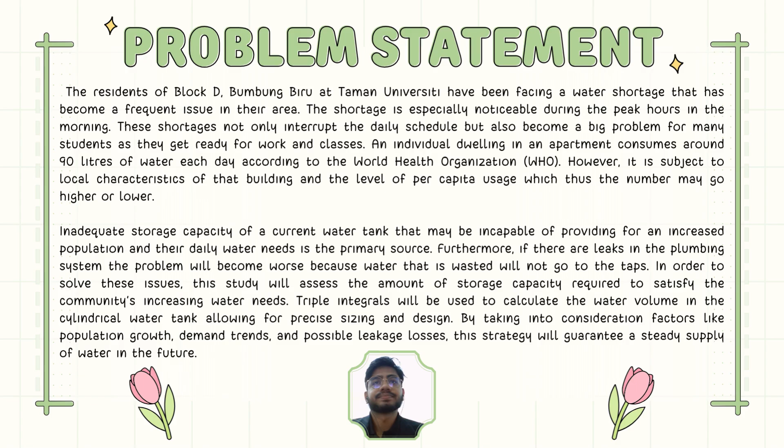Assalamualaikum. My name is Muhammad Amiruddin and I will continue with the objectives. For this project, our group has determined three objectives. The first one is to understand and apply the concept of triple integrals in the cylindrical coordinate system to calculate the volume of water. The second one is to evaluate water usage requirements for residents based on WHO recommended daily consumption. And the last one is to calculate and compare the volume of water storage in the tank with the daily water requirement of residents using the triple integral method.

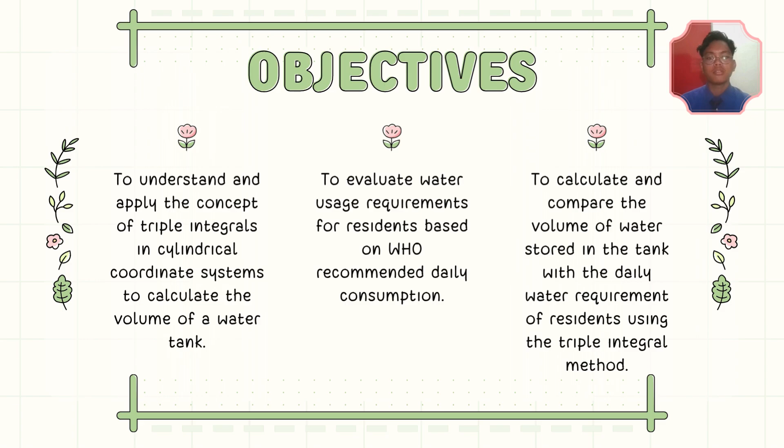Okay, now let's move on to the literature review. Let me brief you about the background of the project. Water tanks are essential components of water supply systems, storing water for domestic, industrial, and commercial use. Water tanks are very important to regulate pressure and ensure reliability during peak times or emergencies. Tanks have multiple uses. Based on their uses, the materials will be steel, concrete, or polyethylene, and they may be cylindrical, rectangular, or spherical in shape.

This study focuses on a cylindrical tank, with its volume calculated using the triple integral method in cylindrical coordinates for accurate results. WHO, the World Health Organization, recommends about 90 liters of water per person per day for basic needs, including drinking, cooking, and sanitation. This requirement may increase in urban areas due to lifestyle differences; factors such as climate, household size, and infrastructure can also affect daily water demand. And the lack of sufficient water can impact health and hygiene.

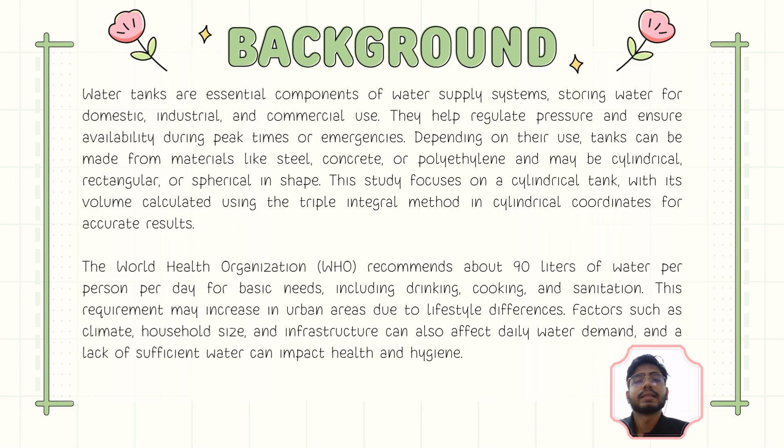Let's continue. Residential water use depends on household size, plumbing system, and user habits. Peak demand typically occurs in the morning and evening, putting pressure on the system. In high-rise buildings, water tanks are critical to meet this demand, but poor maintenance or leaks can result in up to 10% water loss, reducing usable supply. So, to ensure an adequate supply, the tank's storage capacity must match daily demand in the residential area.

So, this study calculates the tank volume using triple integrals and converts the results to liters for comparison with daily needs. Peak demand and future population growth are also considered in this design. For this case, Block D of Bumbung Biru has 20 units with 5 people each, totaling 100 residents. This estimate helps to determine total daily demand, with a safety margin added to account for changes in occupancy.

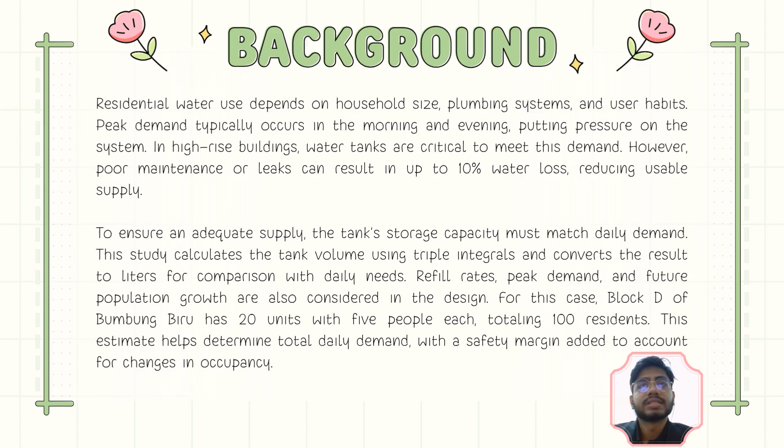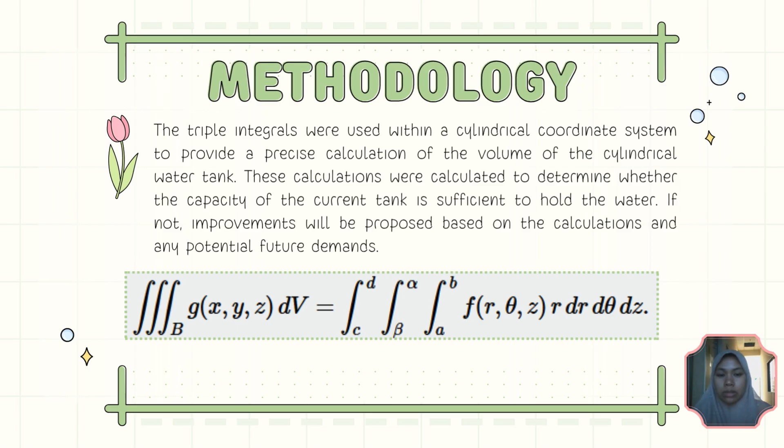My name is Nur Nagisa Jua, and I'm going to talk about our methodology for this project. For this project, we are going to use triple integrals within the cylindrical coordinate system because we want to provide a precise calculation for the volume of the current water tank, because we want to determine whether the current water tank capacity is sufficient or not. If not, we will propose an improvement based on our calculation or any potential future demand. As you can see below, this is the equation for the triple integral within the cylindrical coordinate system. So we are going to proceed with the FILA table.

The first fact is the residents of Block D keep facing water shortage, especially in the morning. So maybe the current water tank might be too small, and we need to resize the water tank. So the problem here is how to calculate the volume using the triple integral in cylindrical coordinates. So we need to study and understand the triple integral so we can calculate the volume.

For the second fact, the water tank has an overall height of 3,500 mm, an outer diameter of 4,000 mm, and a thickness of 100 mm. And the lid diameter is 900 mm. So we're going to use this in the cylindrical coordinate formula for the model of the water tank. So the problem now is how to determine the radius of the cylinder for the inner part.

So to solve this problem, we need to refer to the water tank thickness, which is 100 millimeters, and subtract the outer diameter for each side by twice the thickness. And we divide by 2, so then we get the radius of the inner part. The third part is sketch the cylinder in 2D graph XY and 3D graph XYZ. And this information will be used to develop the triple integral in cylindrical coordinate volume.

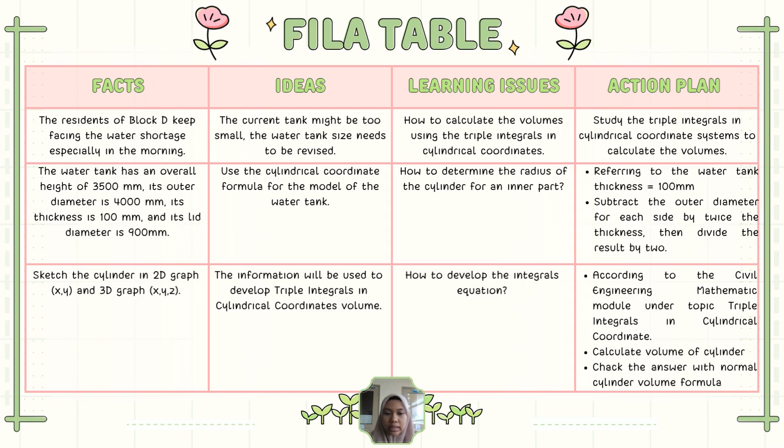So the problem here now is how to develop the integral equation. So according to the civil engineering mathematics module under the topic triple integral in cylindrical coordinates, we need first to calculate the volume of the cylinder and check the answer with the normal cylinder volume formula.

For the fourth fact, referring to the World Health Organization, WHO, a hostel building uses 90 liters per head or 3.75 liters per hour. SPAN states the recommended flow for bulk meter size is 50 millimeters. So the idea is the total daily water usage needs to be calculated. So how to calculate the water tank capacity, time taken for the water tank to be filled, and total number of people in Block D?

So we need to calculate the total number of people first, then calculate the time taken, and then calculate water tank capacity. And after all that, we're going to compare the value of water tank capacity with WHO information, with liters per head, and analyze the data calculation.

And the last fact is ensuring the future demand is met. So we need to design the water tank that is suitable as the population grows. The problem now is how to calculate the population growth in the volume calculation since we don't know how many people will be in the future. So the action plan is we just estimate the population growth and revise the water tank accordingly.

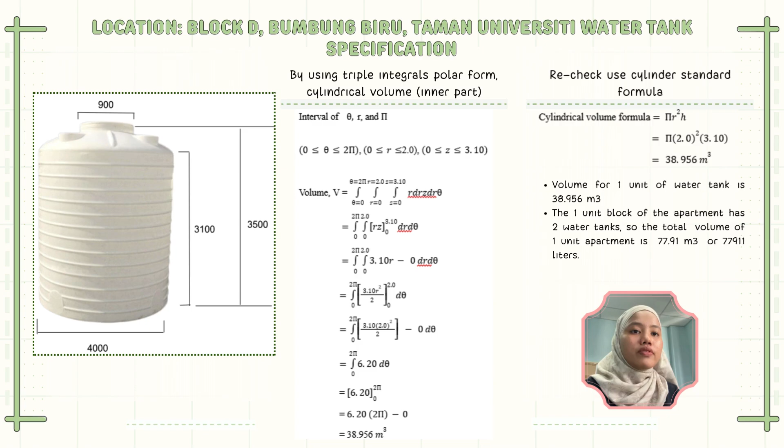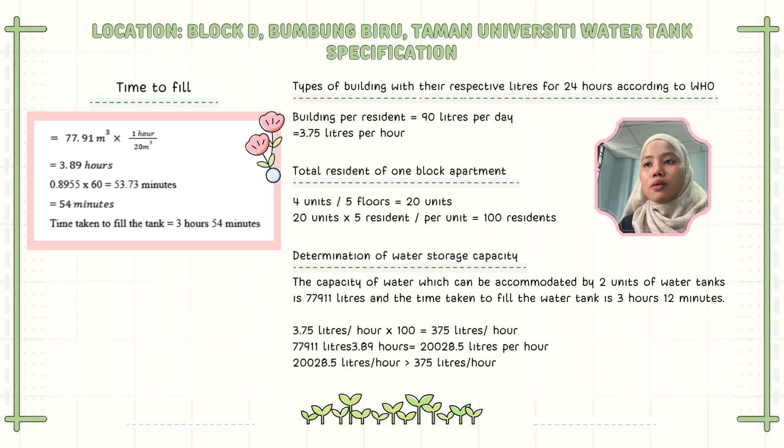I will continue talking about the discussion. So our group has successfully calculated the volume of the cylindrical water tank at Bumbung Biru using the triple integral method in cylindrical coordinates, which is 38.956 cubic meters for a tank, which was then verified with the standard cylinder volume formula, which is pi r squared times height. So we got the same answer. The total storage from two tanks is

77,911 liters. With an inflow rate of 20,000 liters per hour, the tank can be fully filled in approximately 3 hours and 54 minutes. Based on WHO standards, the total water demand for 100 residents is 375 liters per hour. When compared, the inflow rate is greater than the outflow, confirming that the current tank system is sufficient and meets daily water needs even during peak usage.

For conclusion, the triple integral is a mathematical method that is highly useful for calculating volume in three-dimensional space. In this project, the triple integral was applied to accurately determine the volume of a cylindrical water tank. The results show that the current tank capacity of 77,911 liters is more than sufficient to meet the daily water needs of 100 residents, who consume about 375 liters per hour. Therefore, the existing water tank is proven to be effective and able to support demand even during peak hour.

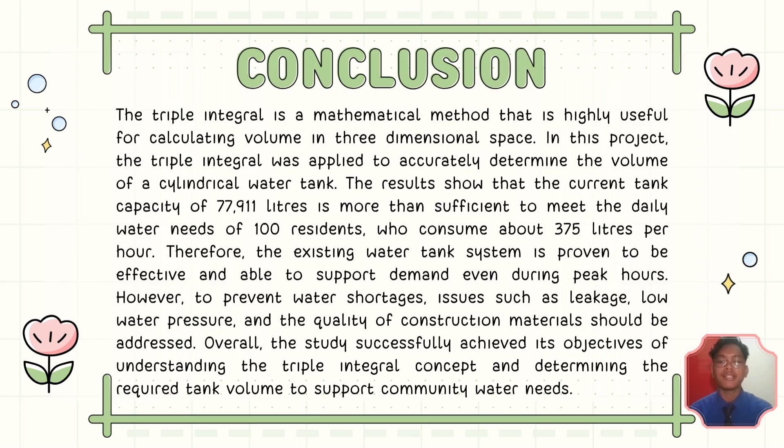However, to prevent water shortage, issues such as leakage, low water pressure, and the quality of construction material should be addressed. Overall, the study successfully achieved its objective of understanding the triple integral concept and determining the required tank volume to support community water needs.